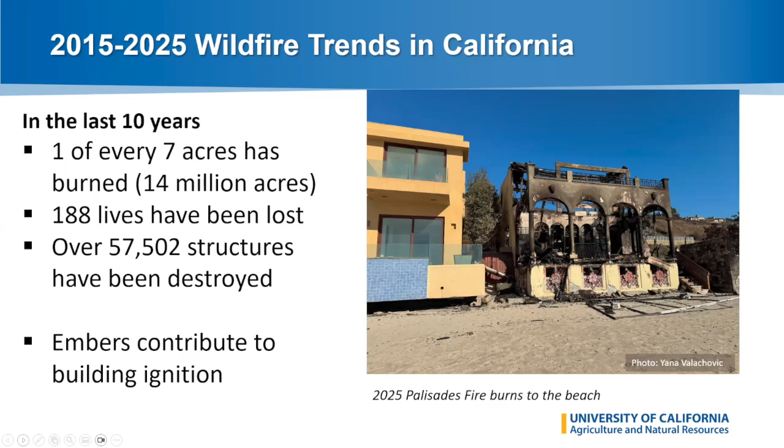Well, over the years, we've talked a lot about defensible space work, which is really fuel modification to interrupt the transmission of fire towards the structure and make it such that we might not have a pathway, or if we do, that the flames and the vegetation are such that the flame height is reduced significantly and crews can safely stage to try and defend the structure. Meaning the flame height is 4 feet or less. That's about when people can actually be successful against cutting line and the movement of fire. You can also work up to about 8 feet with dozers and other types of mechanized equipment. After that, everything is the indirect method, and it's a lot harder.

So flame contact, I think, is what we've talked about forever and ever. But this issue of embers and radiant heat is in some ways kind of moving into our cultural awareness. And I think embers probably are better understood now. So they're moving through the air column. They can land on, in, or adjacent to the structure. And they are able to ignite things that are combustible in those different locations. And they can exploit and enter through vents, open windows, dog and kitty doors, a garage door that doesn't seal very well. And you can kind of see where that progresses. And as a result, you end up with ignition inside the structure, or you end up with flames right touching the outside of the structure.

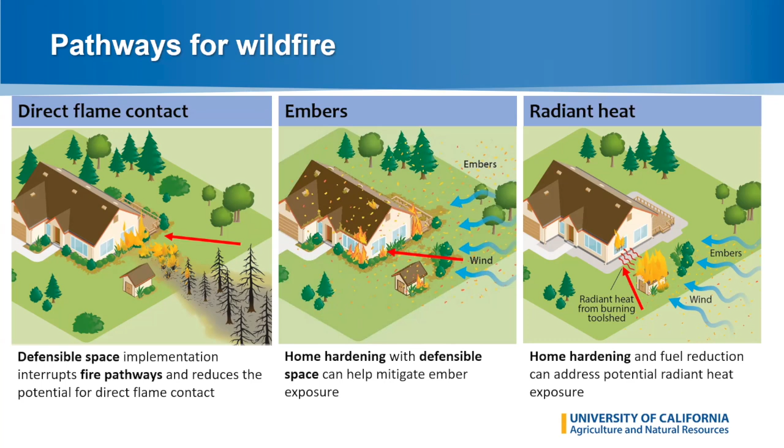So how do we manage that? Again, through home hardening, where we can kind of shore up those weaker elements of the building, and then doing some fuel reduction so we don't end up with a high radiant heat load from surrounding vegetation. So, all right, you guys all with me on those terms? So I'm going to use those in various different combinations as I speak today.

So the fluid dynamics are interesting. And if you're to try and understand this in your own place, if you've ever been sitting out on the front porch or the back deck and you've seen the leaves swirl and get these little eddies of swirling, that's where you're likely to see embers go. They're going to follow those same air patterns, which are a bit of a product of the wind direction as well as the shape of the building.

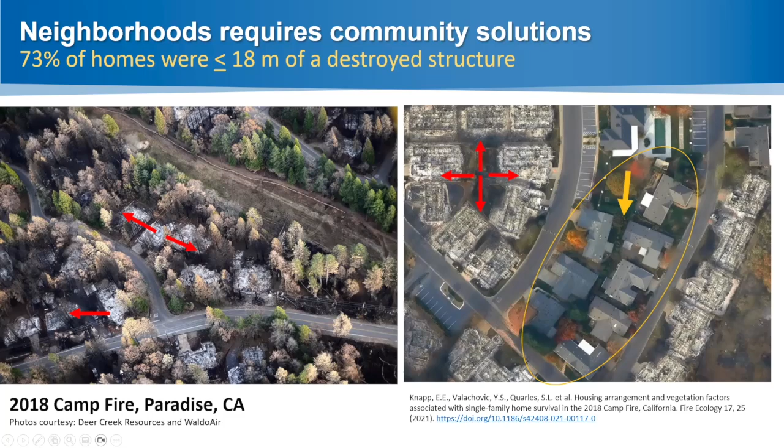And just looking at the right, I don't know why there wasn't ignition on the right-hand side. If the block stays together, then the community generally stays together. But if you lose one building where there's greater density, you really can see that interaction effect. So these are whole homes. And I know a lot of the towns and communities in and around Inyo and Mono are constructed with often a little more space between the buildings. But this is just to get a visual on this kind of separation distance and how that has some interaction effect.

Simultaneously, we can have wind picking up embers and picking up debris, and those get moved long distance, and they move more deeply into our built communities, and they find pathways into our buildings, and they find receptive fuels, as in our landscaped materials all around our buildings, and all of a sudden you've got spot fires that are deep within the community.

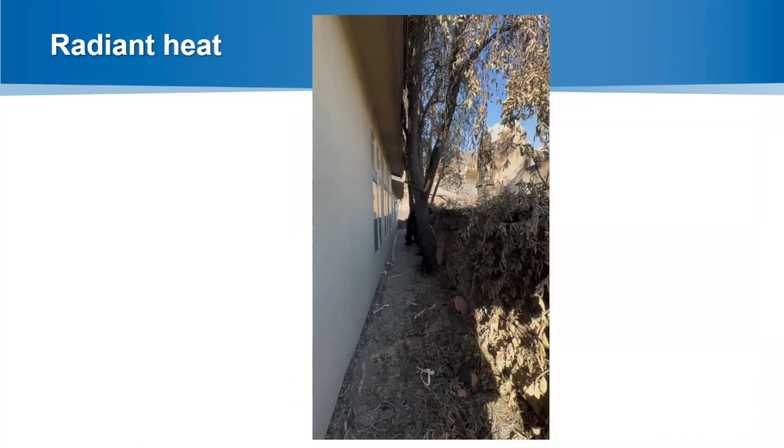All right, so I've got a couple of videos that I'd like to show to illustrate these. These are taken with my cell phone, and I think there should be enough audio. Walking down this pathway between the two buildings, you can see that the trees got involved, and the trees led to a lot of heat exposure onto these windows.

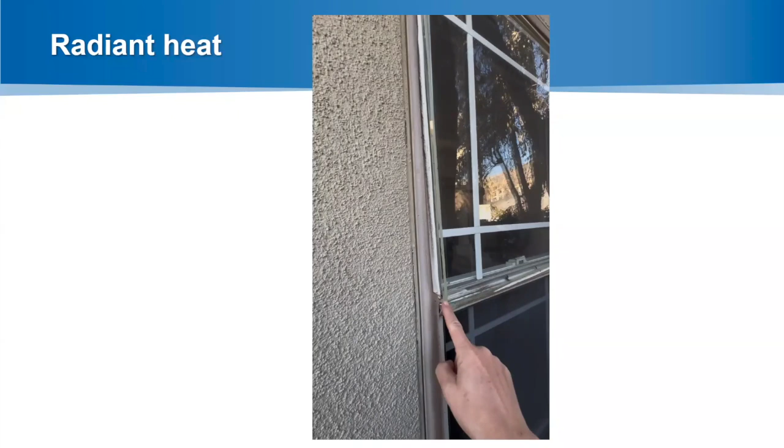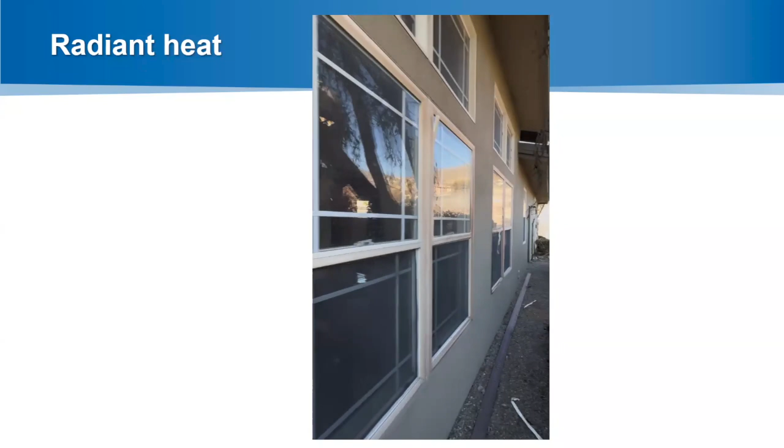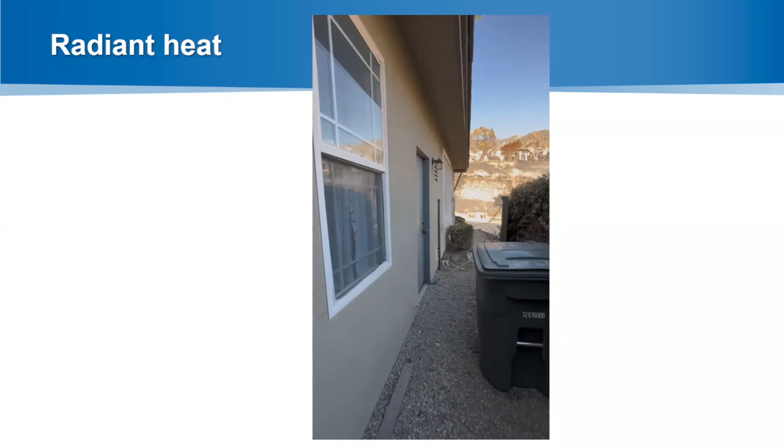Here's where the window pane is on its way out because the glazing has melted, and you can see the breakage up there. These look to be annealed glass. I don't see the tempered glass bug, and you can tell by the way that the window is cracking. And then over here, the gate engaged.

I don't know if you were able to hear that well enough. Crystal, was that loud enough?

Yes, I thought that it sounded fine.

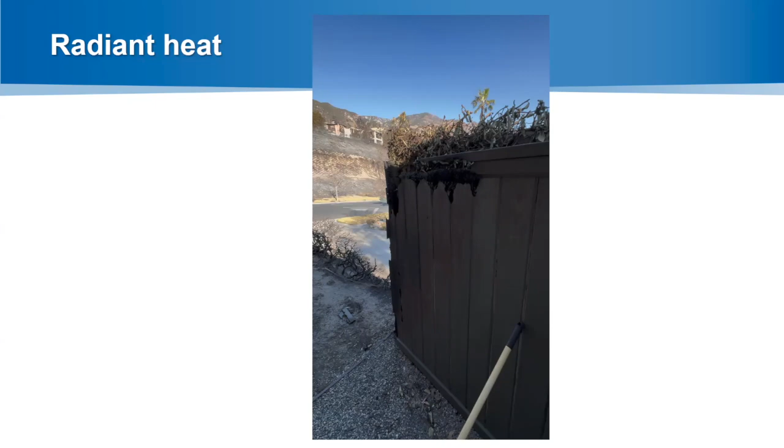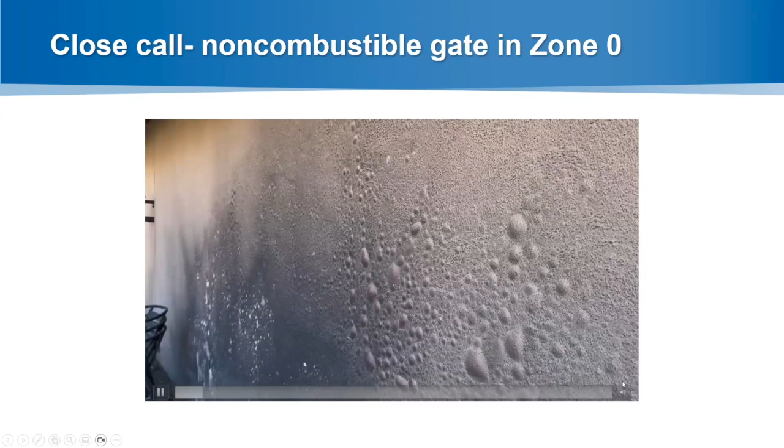I'm going to flip it around a bit so that we can get some wider view on what this looks like, where we're at this interesting place where we've got some damaged and some lost structures. Mountain view behind us, and we can see the damage on the stucco siding. And there actually isn't a lot of fascia damage, to my surprise.

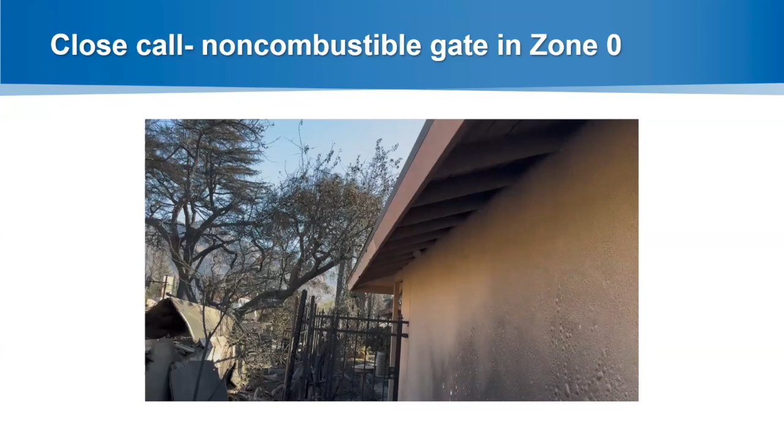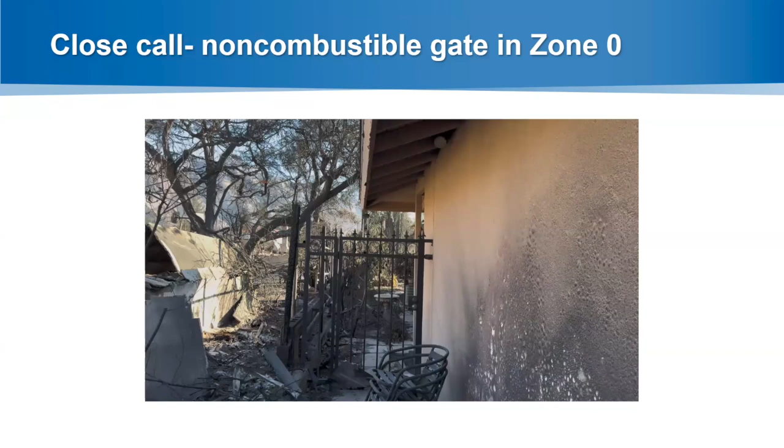What we've been seeing in this fire is that the stucco construction helps hold in the heat as the building burns, and then it later collapses, which is likely what is slowing some of the heat damage on the adjacent building. But walking down this way, you can see that this gate was really critical in not wicking the fire to the building, where here is the remnants of the wooden fence that was separating the two properties.

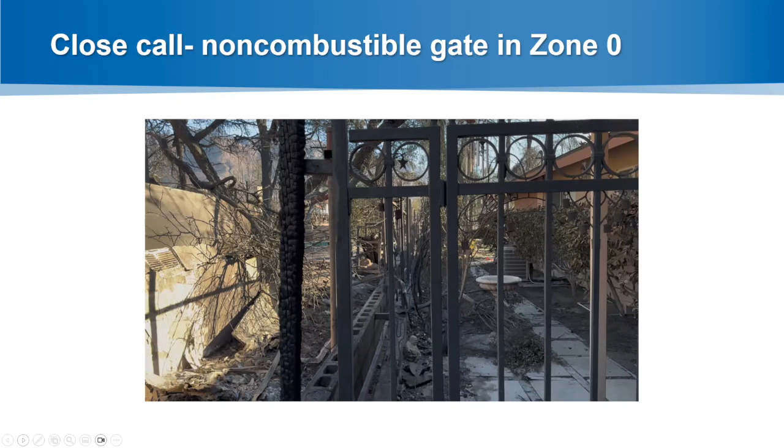So I know that's a little quiet here, but this is a whole fence line, sits on top of a little cinder block, and we lose the whole fence. We lose the house to the left, but the house on the right holds together. So pretty impressive. And just that gate separation is what made the difference in survivorship and loss in this particular situation.

This one, I believe I don't have audio of. So this is Upper Altadena. The fire moves through this kind of open space area. You can see the connection potential through that fence. Look at the big use of patios all around here. You can start to see some of the ember wash here. They've got a metal gate.

There's this block wall here, and that block wall holds a lot of radiant heat. There's some ash there. Here again is a metal gate, which is fantastic. So if you get ignition, it doesn't move from one side to the other. But when you look over the wall, look at what happened just over here. So lots of heat damage coming from that direction, but the block wall really helped keep some of that heat damage away.

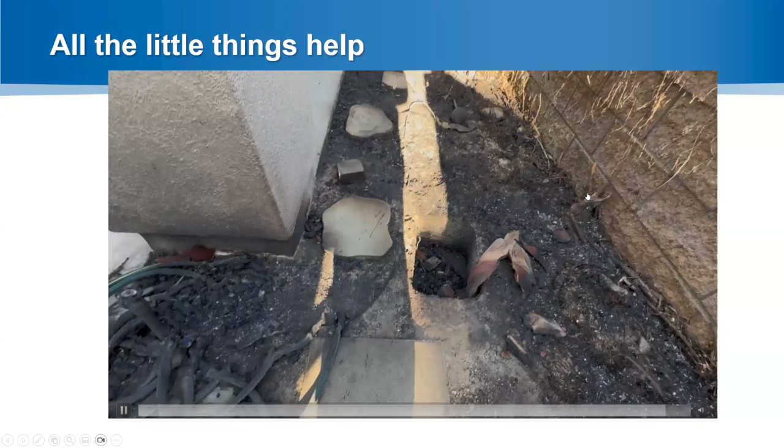Now, this house is almost perfect, but then when we get to the front, you can see that there was some combustible mulch, and we lose the hose reel. We lose some stuff along in this section here. That's where the water shutoffs are and that plastic in there. And we burn off a bunch of this trailing shrub that is planted over these block walls, really common. So, block wall, great, but then if you cover it in combustible stuff, that's less great.

And then you can see how the palm tree was able to burn off the kind of edge of where the fronds are removed. My point is I'm just trying to show you different examples of what combustibility looks like. And then I want to show a little bit more about connected fuels.

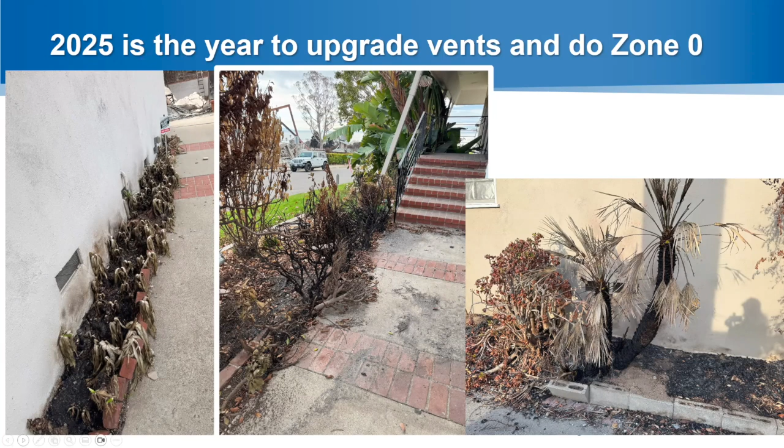There's lots of different approaches on how to do this, and there's stuff that you can do that's low cost and more easily accomplishable. So we've talked just briefly about vents. Most of us have a mesh screen size of 1/4 inch. And what I'd like you to think about is if you could cut that down to 1/8, not farther than that, but 1/8, so that when ember exposure occurs, you might have a little tiny bit that goes through. It's not going to extinguish anything. It's not going to ignite anything because the ember is so small that it won't have much heat in it.

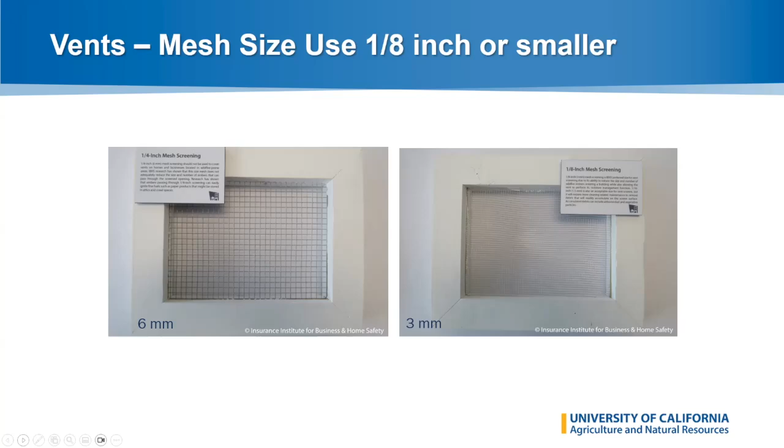So you can add another layer of mesh screening to your existing vents. You can do that with some wire snips to cut the metal mesh, and then a staple gun to add it. Can be done on the inside, can be done on the outside. And I saw a couple examples in LA where people had done that on their frieze block vents. And I'm going to give them a big star and a point for making a difference.

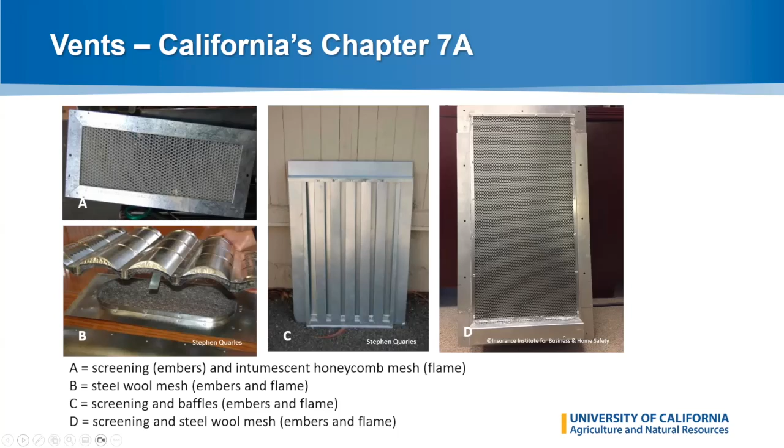There's a class of new vents that resist both flames and embers, and they're super cool. And I can't remember, Crystal and Kristen, if you have them in your materials kit. There's lots of cool things to check out. If you're building new, I definitely recommend building with these vents. And if you've got an area where you're always going to have a flame contact issue because you can't move something, then having one of these vents that makes it harder for flames to get inside is really recommended. And they come in lots of configurations, and they are retrofittable into almost every situation that you might have. Just need to order them if you don't have them available in your store.

So in wrapping up here, there are a number of places on a structure to be paying attention to, and we can follow up with some of these ideas and some of the materials that we send out. But it's a whole comprehensive view. It's not only materials, it's really their installation and the maintenance that all come together to create that hardened exterior structure, and then that reduced fuel zone immediately around your property.

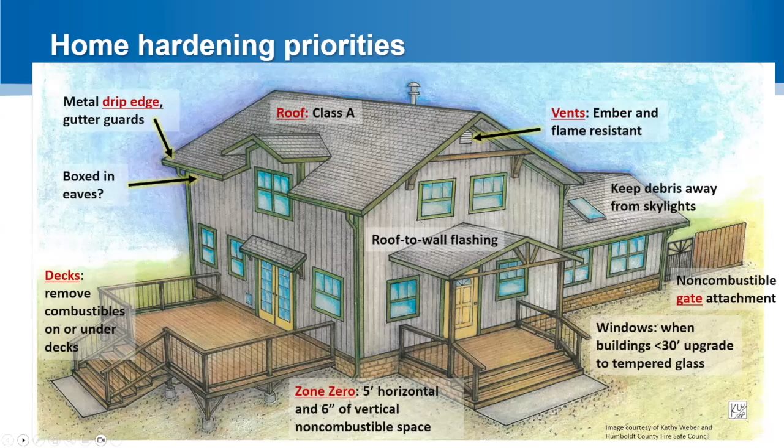So I'll wrap up and then pause for questions here around building and rebuilding. If any of you, or someone you know, are thinking about building or need to rebuild, a couple things to keep in mind. The simpler the roof line, the better, because then you don't have those roof to wall intersections, and you've got a roof that's really going to be the most robust. This idea of the first 5 feet being important, we call it Zone 0, is so much easier to incorporate from the very beginning. And I think there's huge opportunity to do it in a very elegant and beautiful way, where you're still going to have landscaping, color spots, beauty. It's just a little bit farther away from the house.

And as I mentioned before, there's a lot of good information in Chapter 7A of the California Building Code that can help give some guidance around materials to choose from and some bigger thoughts around some of the challenges that we're talking about here.

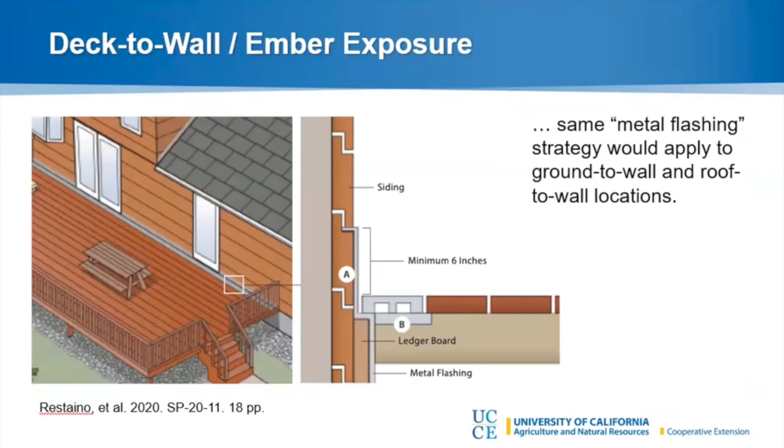Additionally, there's been some great work done at the Insurance Institute for Business and Home Safety with this idea that if you add metal flashing or bitumen tape to the top of the deck joists, if you get ignition in those joists, and that's generally where we tend to see ignition is from the underside on the deck joist, but sometimes it comes from the top, it can kind of slow that spread and progression towards the building. So a piece of metal flashing, not very expensive, or this metal bitumen tape, not very expensive, are some other ways to get at this issue.

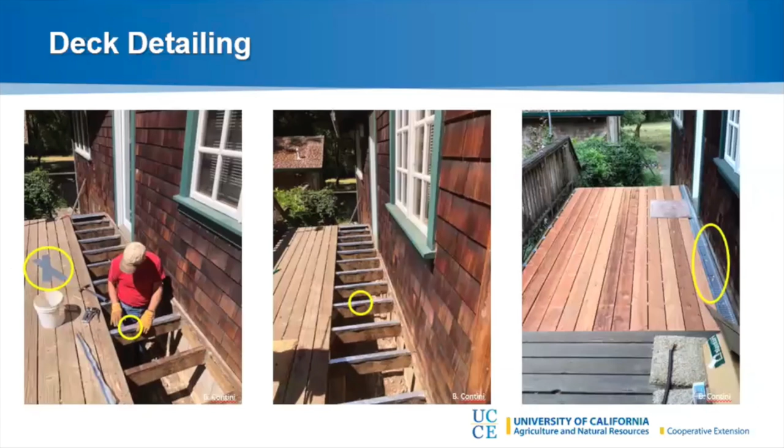And here's just an illustration of how you might enclose the underside of a deck when the deck is low. If the deck's tall and high off the ground, then really it's just about keeping it clear and keeping the debris out from underneath it and not storing it. And if your house is such that it's possible to put some kind of patio or do something differently, by all means, use that approach. But in all cases, there really isn't a non-combustible deck board. There are a variety of different choices, and even the composite ones are flammable in their own way.

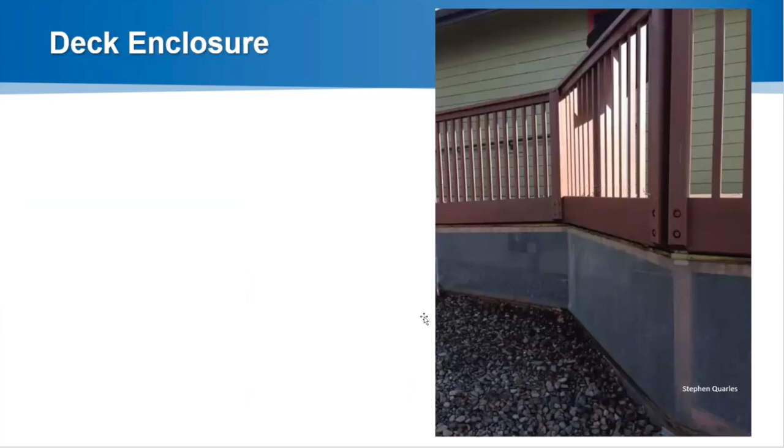Next question is, I noticed in our new well-insulated home that the doors are so tight that they sometimes don't close all the way, later blowing open in high wind. This could cause problems after evacuation. Could you speak to evacuation checklists that homeowners can do before leaving? Yeah, that's a really terrific question. I think you're identifying, this is a weak issue in your house. And I certainly have known a door that doesn't like to close and doesn't like to latch.

And I highly recommend that you write down a checklist, because in the moment of panic when you're trying to leave, I forget things. So that checklist is really important. And we have some on our University of California Fire website. Crystal and Kristen, you might have some. But there are different things to do at different time intervals. And so if you've got the luxury of time, if you anticipate a fire might lead towards an evacuation, what you do 6 hours before that evacuation might be very different if you only have 6 minutes.

And so, I'll just kind of hint at the things that you should do when you've got more time. And that is like, shut your propane tank off for your barbecue and move it away from the property, or move it inside the garage. Throw the doormats away from the house. Move the combustible furniture either in or away from the deck, so that you don't have something that's going to ignite on the deck. Stage buckets of water. So if someone comes by, they can throw some of that water if you've got a little spot fire. Leave a ladder up. Close every vent and everything down that you possibly can.